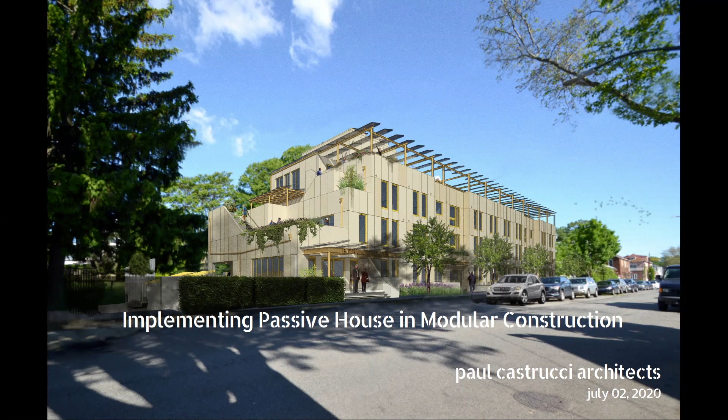Thank you, Andreas, and good afternoon, everyone. My name is Ashok, and I'm the sustainability lead for my firm. Grayson and I are really excited to present our firm's approach to designing low-carbon, healthy homes. We believe architecture should be equitable, sustainable, resilient, and foster community. We approach architecture holistically. We applied the Passive House methodology, and in today's presentation, we would like to discuss our approach to design by examining some of our key projects.

We will look at the challenges of building affordable housing, including drivers of costs in affordable housing, while aiming to hit the Passive House standard. Finally, we will present why we have chosen to go modular on some of our projects by examining two projects, Bethany Senior Terrace and Habitat Net Zero, to further explore topics in modular and passive house.

Our design aligns with UN climate goals. Some 40% of carbon emissions in the United States come from the building sector. New York City Local Law 97 emission caps are calculated directly from the UN climate goal, which recommends reducing carbon emissions by 80% by 2050. So how well does passive house stack up here? Well, it stacks up pretty well. We use data from the city's benchmarking report as well as in-house modeling on our existing projects.

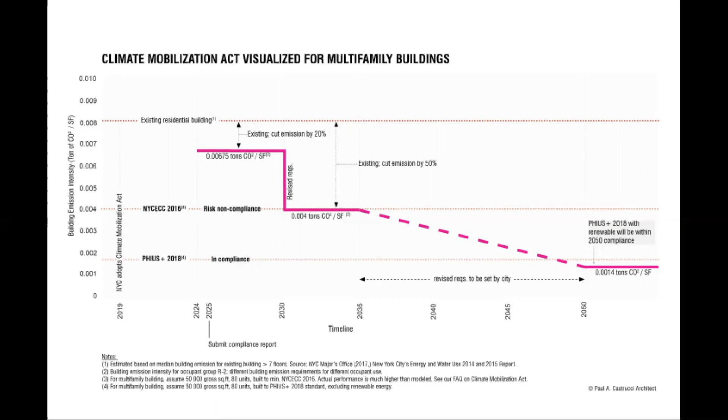What we find is that existing buildings on average don't meet Local Law 97 for 2024, and that when we build multifamily buildings to New York City Energy Conservation Code 2016, it's just at the target for 2030. So there is a risk of not meeting the 2030 emission caps. But when we look at projects being certified to the Passive House standard, we see that it comes very, very close to hitting the 2050 goals set by the city. Now, in our simulation, we didn't add renewables. So when we add the renewables, Passive House buildings would be within the 2050 standards. So now Grayson will talk a little bit more on our projects.

Yeah, thanks, Ashok. I'm Grayson Jordan. I'm one of two principals for Paul Castrucci Architect. Before we get into the modular case studies, I just want to give a little background on our firm and historically how we've come to implement passive house in our work, and specifically how we implement it in affordable housing and how that's leading us to these explorations of modular construction for affordable housing.

So the first project I'd like to look at is our first passive house project, designed in 2009. It's the ABC No Rio Community Center. It's a 10,000 square foot arts and activist community center located in the Lower East Side. Our firm is a Lower East Side firm. We've been working in this community for 3 decades. And a lot of our work historically has been with local artist groups and local low-income cooperatives.

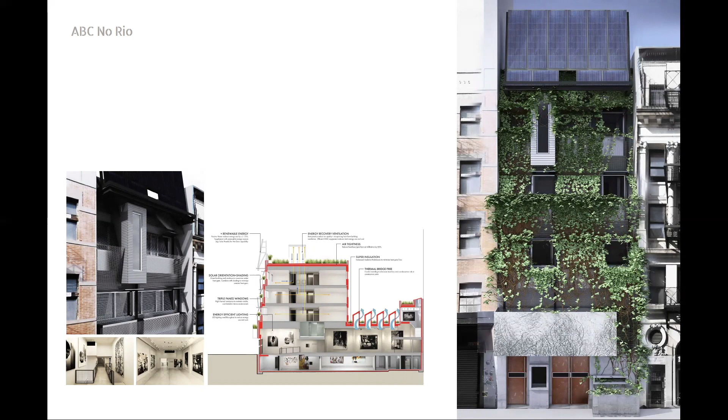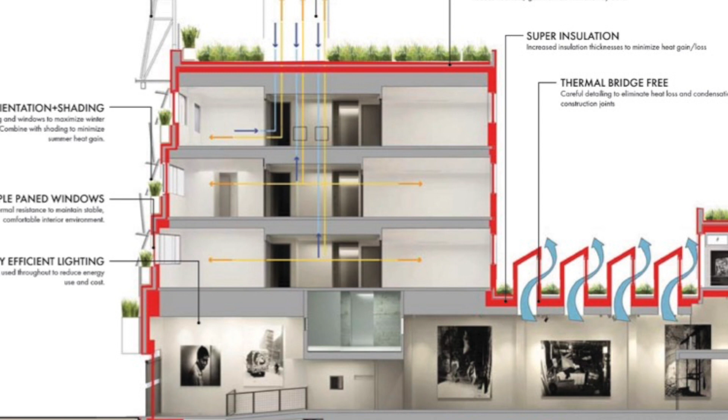Working with this group, ABC No Rio, they wanted the design to sort of visually signify their values. One of those is environmental justice. So in addition to the green wall at the front facade, implementing Passive House was very much aligned with their values. ABC No Rio is a grassroots organization, so they don't have the deepest pockets. And so from our very first Passive House project, our firm has been very interested in developing detailing and constructible standards that can get us to Passive House on a budget.

And so we're really looking to leverage existing construction materials and construction techniques that are well known by local tradespeople, and also clearly communicating to the contractors, especially during the bid phase and pre-construction phase, to make sure that we're doing the best we can to deliver these ambitious energy goals within our budget.

Fast forward to 2014, we've been doing Passive House for about 5 years at this point. We're finding that some of our clients are value aligned with us and are looking to push for sustainability, but not everybody is. And so we're looking to create a demonstration project that shows Passive House makes sense for all projects. And so as an office, we developed a small project in Brooklyn called R951. This is a 3-family, 5,500 square foot building in Brooklyn, certified to the Passive House standard, completed in 2015.

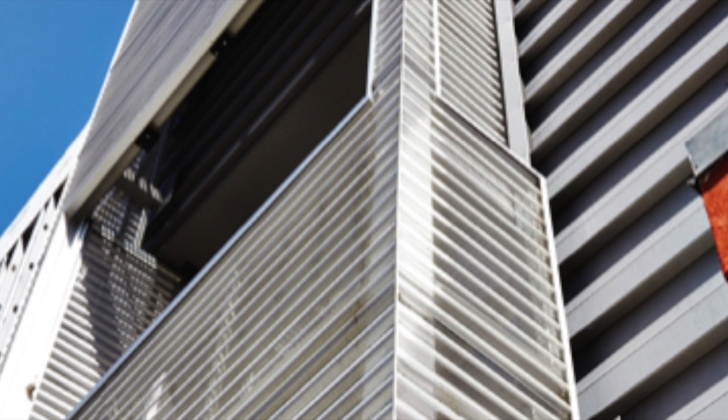It meets and exceeds Passive House standard, and then we have supplemented with rooftop solar PV to become, I think, the first building in New York City that's certified both Passive House and NYSERDA net zero capable. And so you'll see in some of our work, this is a big interest of ours, is using Passive House to push energy use way down, supplementing with solar to achieve net zero capable buildings. And I think, again, successfully showing that Passive House can be economically implemented and can perform well on the open market.

I'll turn it back to Ashok to talk a little bit about our deep energy retrofits for affordable housing. This slide, we're presenting our benchmarked energy data for completed retrofit buildings. In our office, we benchmark all of our projects. We do this for two main reasons. One, it allows us to compare the projected energy consumption with the actual performance. And two, it also allows us to tweak our in-house modeling results.

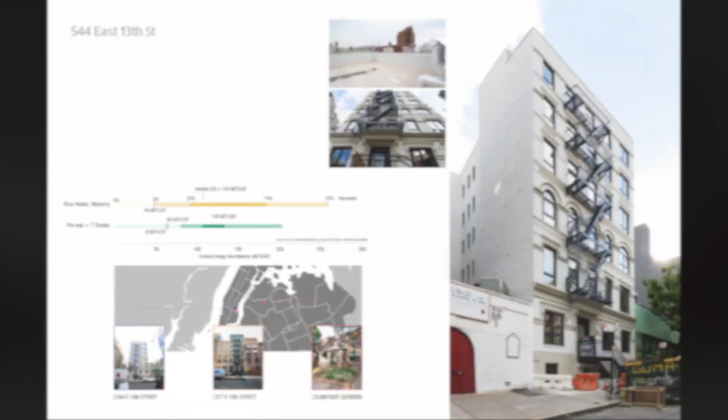What we're presenting here are two 6-story multifamily buildings in the Lower East Side and a historic row house in the Sunnyside Garden District. In the larger photo, that is 544 East 13th Street. This is a pre-war multifamily building retrofitted in 2018. It has 6 floors and a basement, and it's about 14,000 square feet. And this building is an affordable co-op. So when we were retrofitting the building, because it's an affordable co-op, we had a very limited budget, but we still were able to apply the Passive House methodology.

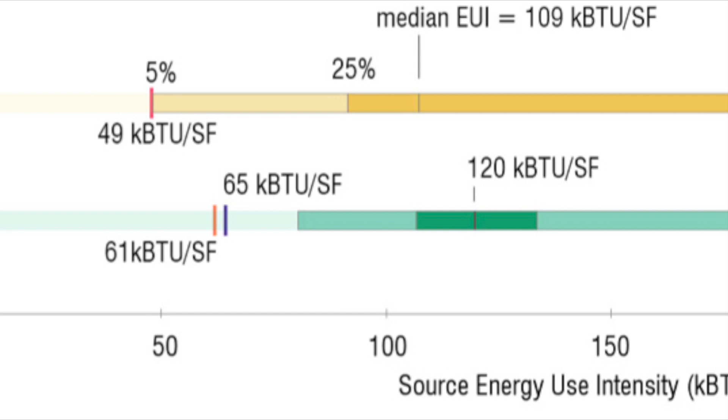And what we find is that even when projects are not certified to Passive House, the building tends to perform really well. The good news for us is that when we compare our benchmark energy data, which is shown in the graphic right above the map, to the city's report that's based on benchmark data submitted to the city, what we find is that the performance of all 3 retrofitted buildings are in the top 5% in terms of energy efficiency when comparing to existing buildings that are the same size and have the same occupancy.

So building on that work of smaller buildings and deep energy retrofits of existing affordable housing, our firm wanted to start to think about, as I think a lot of people are, addressing the larger affordable housing crisis. And we understand that this needs to be done on multiple fronts. So of course we want to continue with the deep energy retrofits. It's a really big piece of the puzzle, maybe the biggest piece. But we also want to contribute on the larger new construction affordable housing. And we also recognize that some of the leaders in implementing Passive House in the city have been our colleagues designing affordable housing. So we started to seek new construction affordable housing projects that are a bit larger in scale.

And so here you can see 4 larger buildings, 2 in Manhattan, 1 in the Bronx, 1 in Far Rockaway, Queens, that are beginning to get a little bigger but still implementing Passive House standards. So on the left, you'll see earlier design. Top is a schematic design project in Harlem, a design development stage project in Manhattan. On the right, we're a bit further along. Bottom right is an affordable housing project in Far Rockaway, Queens, which is in construction documents. And on top is an affordable senior housing building in the Bronx that is under construction now.

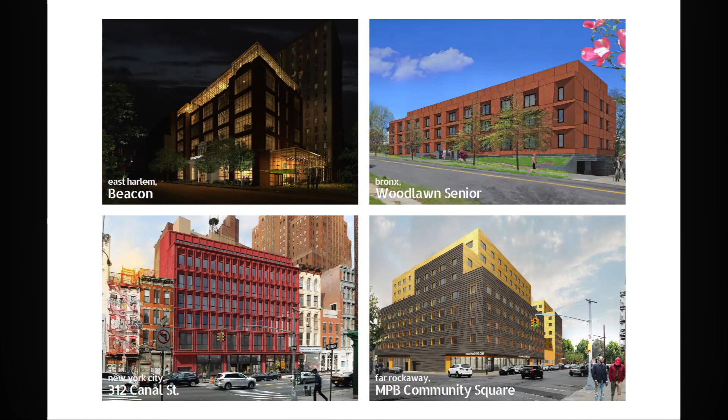So this slide sums up very well our holistic approach to buildings at our firm. We push for net zero energy by combining Passive House with renewables. We use energy modeling extensively in the early design phase. It enables us to make better decisions, and in most of our projects show an economic case for Passive House buildings. We also make a case to our clients to go full electrification. It helps reduce carbon emissions, is cheaper on our clients' utility bills, and healthier for our occupants.

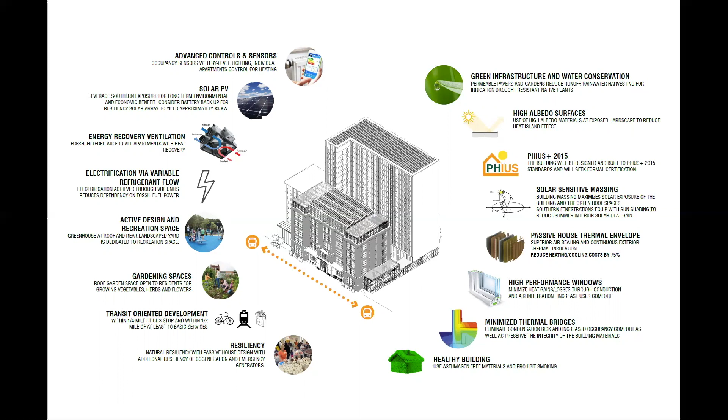And since we spend most of our time indoors, we take extreme care to use up-to-date standards to design for a healthier indoor environment by providing adequate ventilation, designing homes that will also cause fewer illnesses. We select materials carefully so they do not off-gas, and we also use THERM extensively to ensure minimal condensation risk.

Affordable housing construction in New York City is really a pretty well-defined process. It's typically going to be block and plank construction. And there are a lot of people doing really good work within this typology, especially implementing passive house in New York City. But there are limitations.

Specifically, there are budget limitations, primarily driven by labor cost, especially in senior housing, which, as many people may know, is driven by prevailing wage rates, which increases construction costs by up to 60 or 70%. You're also, for the most part, married to this construction typology. Most affordable housing is done this way.

And as we begin to contemplate how do we get to true carbon neutrality, we need to start thinking about whether buildings that are primarily made of CMU and concrete plank are really the best system to get there. As with any construction typology, there are also planning and layout rules of the road that will affect our layouts and our maximum height and what we can do with our setbacks. And finally, there's always an issue of quality control, which gets exacerbated the bigger you get.

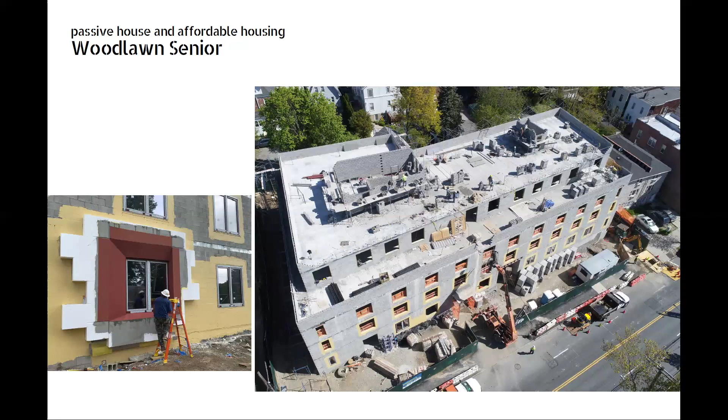So whereas the first mock-up might be excellently installed by the best crew, do the 50th through the 100th windows get installed by the same crew? Are they done on a cold, windy day so some corners are cut? And we're always looking for ways to make that process better, which brings us to modular construction. Before we get into our case studies, just a word on what we mean by modular.

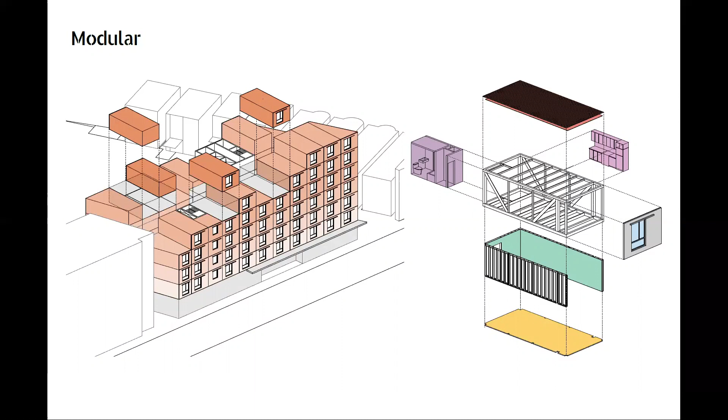Modular to us means it's a 3D object. We've got 4 walls, a floor, and a roof. Within that is completely finished space. So you'll have your kitchens and your bathrooms and all your finishes installed. Your windows will be installed. Depending on how you deliver the modular, perhaps the facade is installed or perhaps not. These mods, as we call them, these boxes, are built in the factory completely, shipped to the site, and stacked up to make the building.

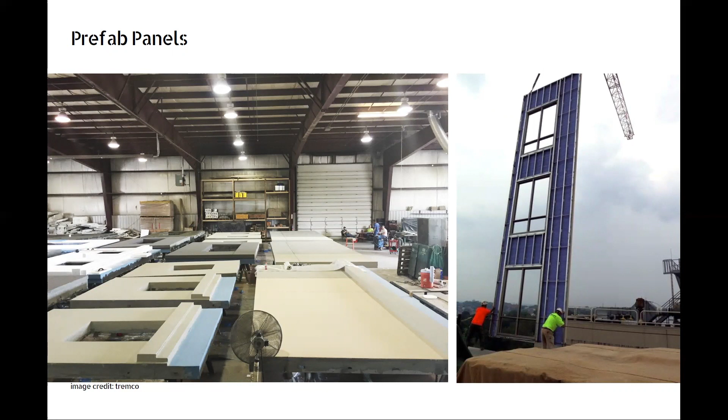This is a bit in contrast with prefab panels, also a factory produced product, but this is going to be more flat pack. So floors, roof, and most predominantly wall panels built in the factory and shipped to the site and tilted up. This is also a really great approach that we're looking at, especially for deep energy retrofits, the Energiesprong approach. And we're also actually looking at it in combination with modular. But for the purposes of today's discussion, we really are just talking about these 3-dimensional boxes or mods.

And what's pushing us here? 3 main reasons. We want to control cost, especially in senior housing. The ability to push labor offsite is beneficial. We want to reduce construction time. We're expecting these projects to be delivered on site in at least 25% less construction time, probably more. And we want to increase quality control.

With those benefits, there are design considerations that we have to manage. Those include the size of the mods and plans. You're going to be limited in your spans, usually much less than you would typically get, probably around 15 feet. The height of the mods, so that means both the total height that can be shipped, but also as you're stacking mods up, you have at each condition a thicker floor plate because you have a ceiling of the mod with the floor of the mod above it. You're getting increased floor plates, which can be tough to meet the zoning requirements depending on the zoning district.

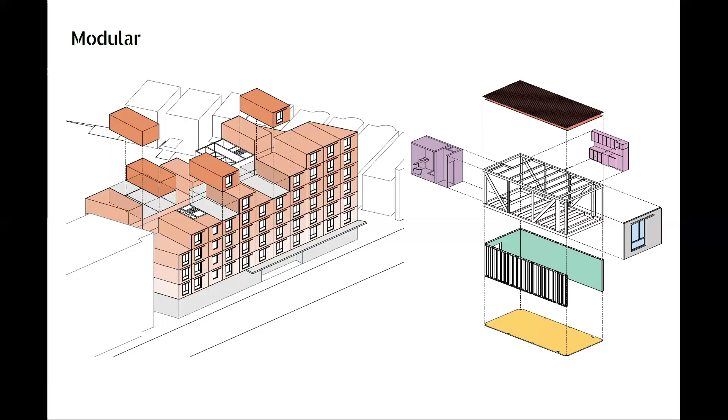We'll of course have to think about the transportation and stacking of the mods. The way that we implement MEP is going to be a bit different in modular construction, and with the more robust MEP approach of passive house, this takes another layer of consideration. And finally, we need to consider testing and inspections through a different lens for modular.

So our first case study is the Bethany Senior Terraces project. This is a 58-unit senior housing building located in Brooklyn, New York. We have just finished 100% construction documents for the project, so we're close to the point where we start construction. This is located in the East Flatbush neighborhood of Brooklyn. It's an R4 zoning lot, so it's not very dense for New York City. A lot of 1, 2, and 3 family buildings in the surrounding neighborhood.

The site itself formerly housed a 3.5-story institutional use. So the 3 to 4-story use we're putting back, senior housing, is actually quite closely matching it contextually. From a design perspective, we want to leverage the advantages of the site, so that lack of density and the ability to have bigger yards, and use that to help meet needs of the residents.

So with senior housing, we want to really encourage socialization in our common spaces and also encourage activity. And so that manifests itself in this project through this series of garden terraces on the south facade. Starting from the top floor where we have a community room, we're carving away that southern facade in a series of steps that sort of bring you from the top floor all the way down to the lobby.

And these are garden terraces, places for the residents to sit and socialize or garden, bring you through the common space of the lobby, and then back out at grade to this sort of generous southern garden to the south of the building, which is about 35 feet, and then terrace down to our cellar community space. And by pushing down these terraces, we create light and air into that cellar space and really create this sort of circuit of activity and socialization for the seniors.

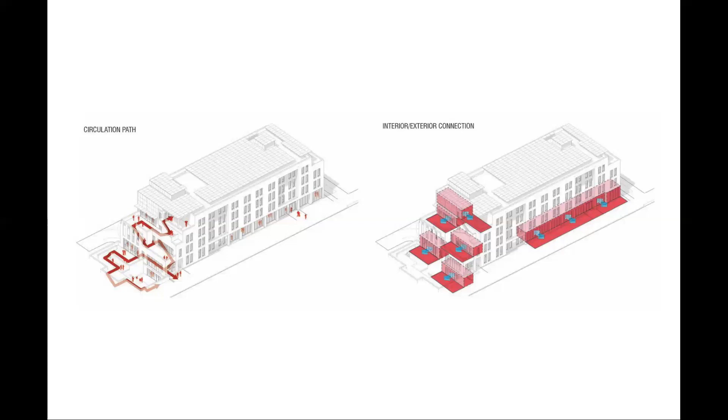This will be a Passive House certified building. We have a great client here who sort of demands that in the first instance, and we're building on that, pushing towards net zero by driving down the energy use with Passive House and then supplementing with a really robust solar PV array on the roof. We didn't quite hit the goal, but we got about 70% net zero capability here.

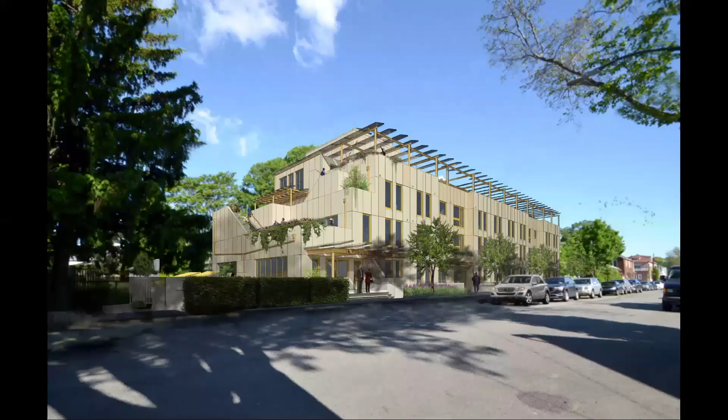Okay, so looking specifically at modular, as with any design problem, it's not linear. We're not trying to solve one problem at a time. We're trying to solve all the problems sort of holistically and together. But one of the first things we really need to look at in modular is transportation and staging.

So we need to understand the route that mods will take from the factory to the site, because there's going to be bridges and tunnels that will sort of dictate your pinch points and might change the size of your potential mods. And then at the site level, we need to look at where on the street can we stack the mods? How many mods can we stack for one day set? And where can we put things like the cranes? And this will dictate not only construction schedule and how many mods you can set a day, but again, may also dictate the overall size of the mod and influence the building planning.

So getting the ERVs into the apartments is beneficial for that. The other is there's actually some cost savings in this case, and this is something that makes senior housing particularly fruitful for modular. Some of you may know that senior housing in the city is prevailing wage labor, which drives up the cost, I would say about 60 to 70% over general affordable housing. And so moving some of that labor cost offsite is beneficial.

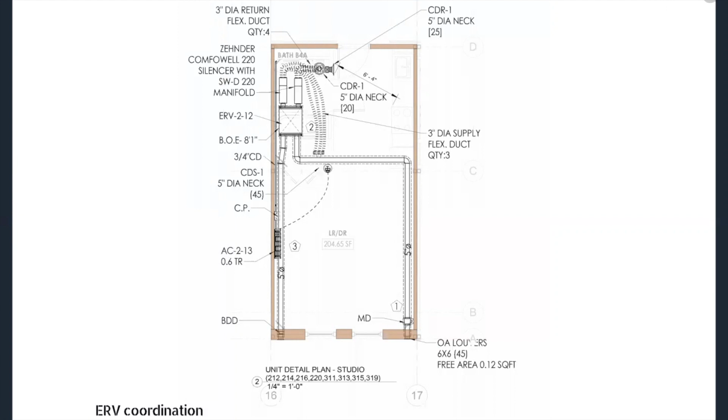This also affects how we're going to look at our bathrooms. So rather than back-to-back bathrooms, our bathrooms are going to sort of face the hallway. All of our stacks will be there. Looking specifically again at the ERV, you'll notice that this necessarily exhausts and intakes through the facade, which will have an aesthetic impact. You also need to carefully place your windows and your intakes and outtakes to make sure that you're keeping the clearances.

This isn't so much specific to modular, but it is specific to our goal pushing towards sort of a carbon neutral future. We want to electrify the buildings. And so we're not having gas hot water heating. We're going to use heat pump hot water heating.

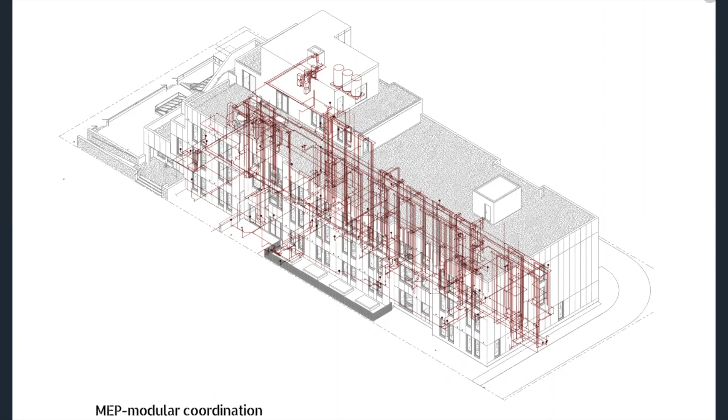And so the system will be comprised of 3 tanks, 1,200-gallon tanks in the thermal envelope connected to condensers on the roof. The condensers on the roof will heat up the water. Having that amount of storage helps us sort of move the load from peak to off-peak. And then we'll have a small amount of electric reheat if we need to get back up to the proper temperature. So just to wrap up this case study, looking at some of the wall sections and detailing issues for Passive House and modular.

Modular construction can come with the facade completely intact. In this case, we didn't go that way. Working with both the mod company and the GC, it made more sense here to build the mods to the sheathing, DensGlass sheathing, put on the air and water barrier, put in the windows, and then have the contractor come and scaffold the building and put an EIFS facade on.

The thinking there is, if you imagine stacking mods up on the site, no matter what, all 4 sides of that mod are going to have to be healed. So your air barrier, your insulation plane, your water barrier and your finish all need to be healed. And that's really important, obviously, in passive house. And so the contractor felt that by the time they put up all the scaffold and made all these small connections, it was actually more cost effective to just do the entire EIFS facade themselves.

2 other considerations at the wall detail level. First, if you look at the middle part of the section, you'll see a mod has a floor and a ceiling, and then the mod above it also has a floor. Block and plank is going to be an 8-inch block, 8-inch plank. That's your ceiling plane. This is going to be a foot for your floor plus 6 inches for the ceiling. So you're more than double what the floor plate is for a typical block and plank. And so that's a real consideration.

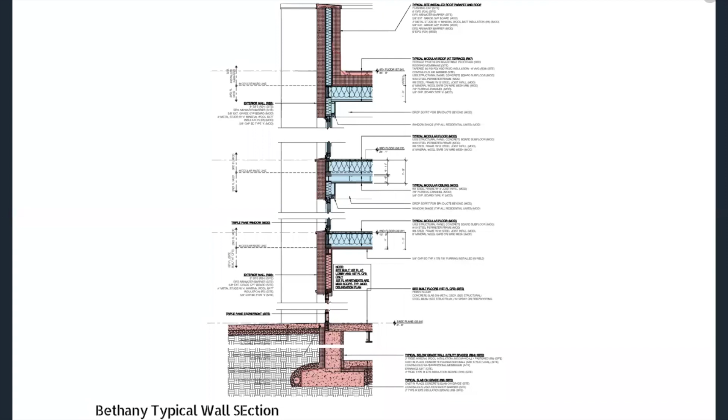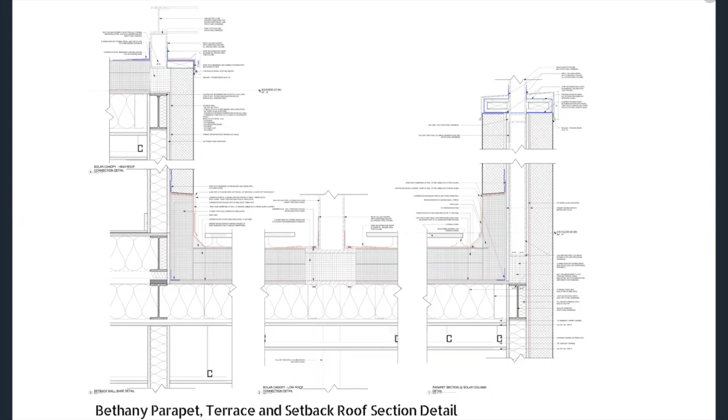This is a detail at our roof parapet and terrace setback. To note here, the parapets are built in the factory. They're like flat pack, structural steel or tubular steel rectangles infilled with metal studs and then bolted down to our mods. And that's a potentially very significant thermal bridge. So at that connection, there's an Armatherm thermal break. And we're using that same detail where we're connecting our solar trellis. We want to make sure that we're planning for all these connections and thermally breaking them. Next slide, please.

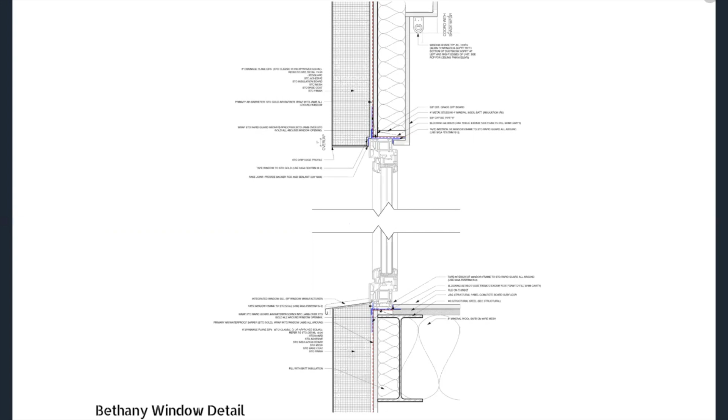They will wrap that into the jamb, install the window, air seal and water seal, tape the window all around, and then it'll be shipped. And the site contractor will seal all those mate line joints and install the facade. And that's it for this part of the presentation. I'll turn it back now to Ashok to look at Habitat Net Zero.

Thank you, Grayson. The next project we're going to talk about is the NYCHA Next Generation Initiative called Habitat Net Zero. This is a project with Habitat for Humanity, NYCHA, and HPD. We're really excited about this project. The aim of this project is to develop small vacant lots to help build single-family homes. To give some context, the city has acquired many foreclosed homes and lots, and the city has been looking to develop these lots to address the acute housing crisis. Habitat Net Zero will also provide a pathway to home ownership, which is critical to addressing the affordable housing crisis and will help blunt against gentrification.

The project is on 13 sites, which are spread across Queens, New York. A significant outcome of this project is to create a methodology to deliver beautiful homes that are healthy, energy efficient, and at a price point that is affordable. So the project scalability, especially on a citywide basis, is a critical success metric for us.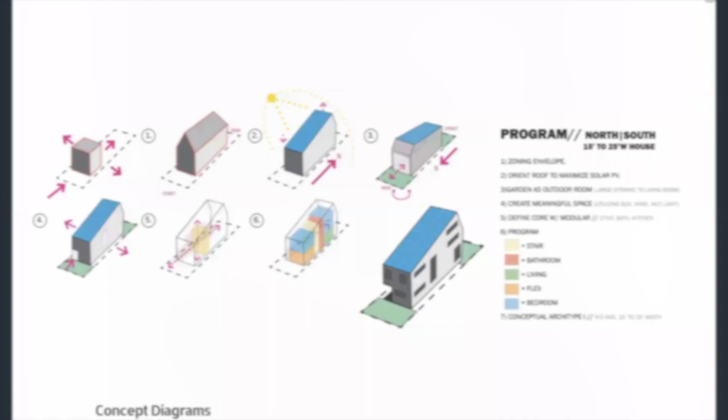We realize that each site has a unique topography, site orientation for solar gain, lot size and lot width, and very different zoning requirements. We also have existing homes in various conditions, some of which were more cost effective to rehab. So in the end, 10 of the 13 sites would be modular and 3 would be rehab projects. Based on the different conditions, we saw a prototype that will deliver the healthy, affordable house that will hit net zero energy while respecting the price range.

The budget also required us to absolutely go just to the essentials. So this project is nearly Passive House, but not Passive House certified. What we found was that when we go towards Passive House and add solar panels, it gives us a cost-effective net zero home.

We engaged very early with the GC for site build. We looked at panel manufacturers as well as talked to modular companies across the U.S. We generally found that the more the building is built in the factory, the lower the price per square foot. Another factor that impacts the cost is transportation of the module, especially because these are smaller projects.

In one instance, there was a large tree that made the transportation logistics a lot more complex, and it drove up the cost, and that helped choose that building to go for rehab. Our final hard cost is about $280 per square foot, and we are really happy with that.

So here we have prototype A. We eventually came up with 4 prototypes. This is based on site orientation, lot size, zoning regulation. Many of our prototypes from A, B, B2, and C have very similar concepts. So the 10 modular homes, it was treated as one single project for HPD. And so we were required to provide one UFAS unit. So this would be our accessible unit.

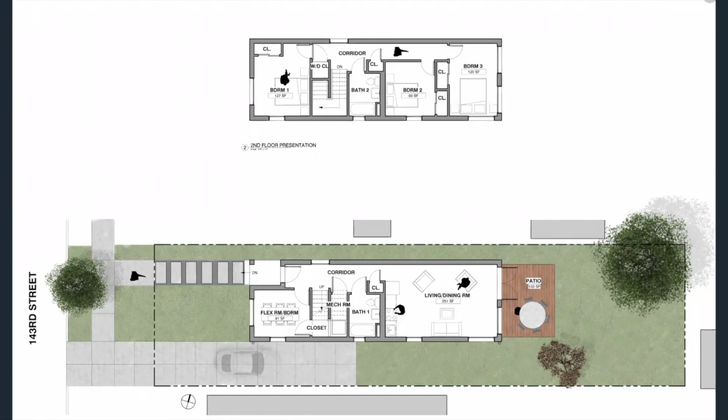Finally, we have a flex room that could be used for dining or den, but it also could be converted into a bedroom to allow for growing families and aging in place. And to help with the architectural design of the project, we added a solar parapet.

We also use energy modeling extensively early in the design phase to help us optimize for site orientation, window-wall ratio, and window selection. So this is like one of our studies where we were looking at the impact of where we're putting the windows, and that had a big impact on the final energy balance.

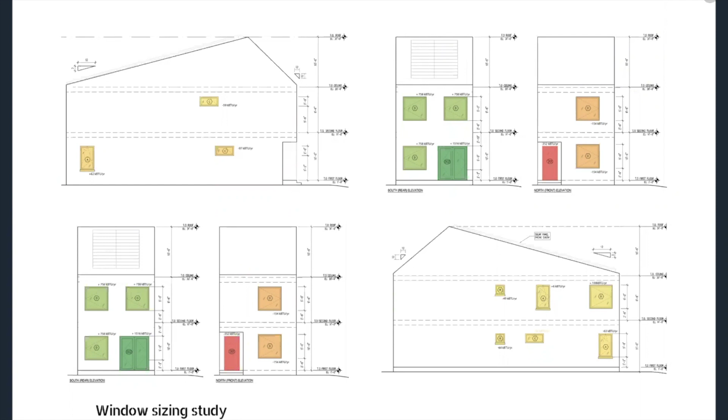Next slide, please. So here we demonstrate how the mods will come together on the site. So first, the GC scope would be the foundation. So the GC will build the foundation on site. Then the first mod will be craned in, and finally the second mod on top of that. The modular solar parapet and solar panels are then craned into place. Finally, there's the patio and the stairs, which also fall under the GC scope and are built on site.

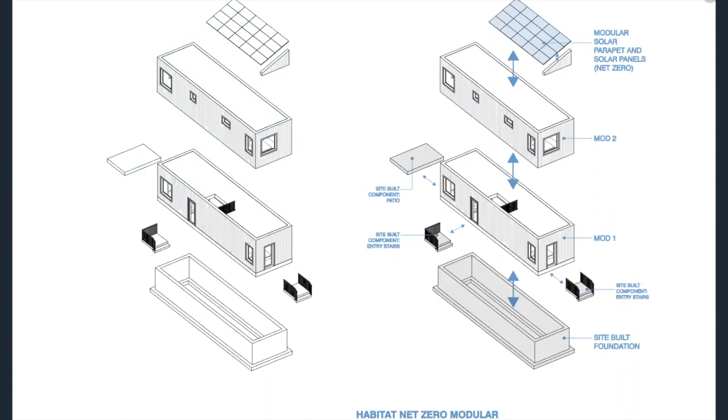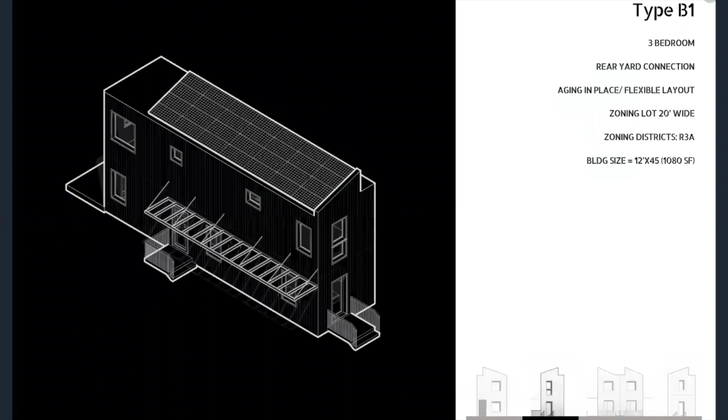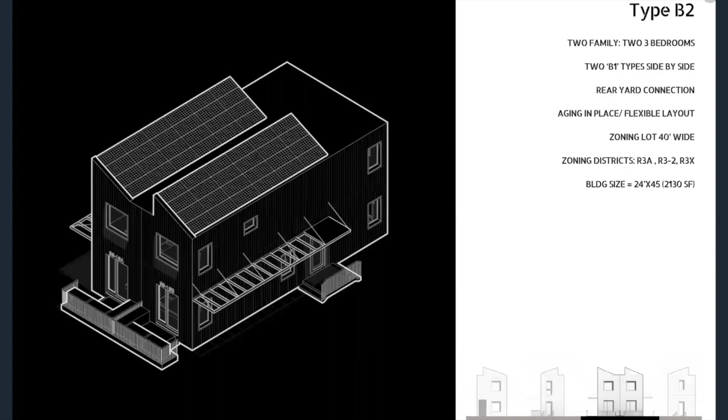This is type B2, and it's meant for larger lot sizes where it could accommodate 2-family homes, and where zoning allows for 2-family homes. And basically, it's 2 B units put together. Our smallest lot size home is the C. It has 2 bedrooms, and this is about 800.

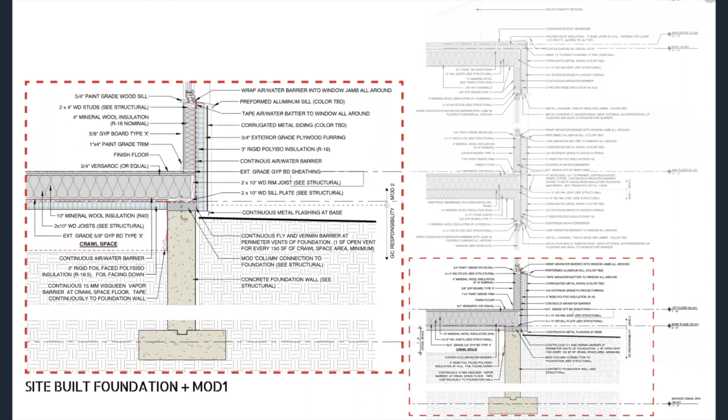So now I just want to go over some of the detailing for Habitat Net Zero. We went with a wood frame construction. The cladding and the exterior insulation here are factory installed. So if we look at the foundation, here's one of the points where we will get a thermal bridge. So how we address the thermal bridge between the foundation and the first mod is to use Armatherm all around as our thermal break. Next slide, please.

We use triple pane glazed windows. Again, this detail is important because this is where the first and the second floor come together, and we see the mate line detail. We also have a double floor plate here between the first and second floor. So basically, how do we get the air barrier and continuous insulation? So in the factory, about 1 foot around the mate line does not have insulation. So when the modules are on site and put together, the GC will then ensure the air barrier and the weather barrier are sealed and continuous, and then insert the insulation back.

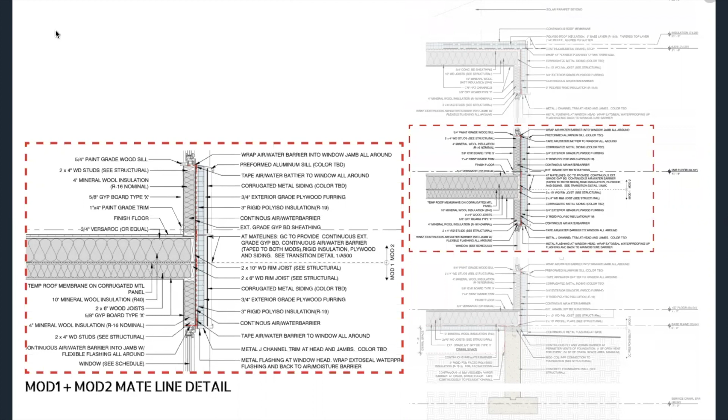So this is the roof detail. What we see, we have about 3 inches of polyiso all around the building, except the roof has a little bit more insulation to get a higher R value.

And the roof is a pretty simple construction. It was mainly driven by cost. It's a flat roof, and the insulation and air barrier is continuous and it's factory installed, so there's no problem there. There is a solar parapet that gives sort of our design feature.

So to summarize, here we have two connections. Basically, the first floor mod to the foundation, where we have the thermal break, and then first floor to the second floor, where we have the GC that could seal up the air barrier and weather barrier.

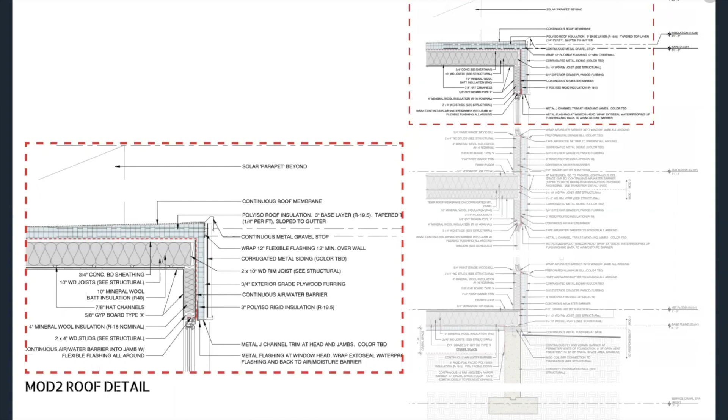Great. Thanks, Ashok. I saw in the chat somebody was asking about this. So modular is going to be a little different in the approval and inspection process. And these two case studies are good because they demonstrate the two possible paths for approvals. So looking at Habitat, which Ashok just went through, smaller one and two family buildings, you apply at DOB the way that you would apply for any job. They look at zoning, they look at fireproofing, but the mods themselves are considered a product.

So the modular manufacturer takes the drawings of the mods, takes them to New York State, has them certified as a product, which is delivered to the site like a very expensive window, for example, or just a big sort of complex product, let's say. So the inspection of that and the certification of that is all handled offsite.

For the larger projects, for most modular in New York City, again, you're applying at New York City, you're looking at zoning, you're looking at proximity to neighbors and fire protection and all those issues at the DOB level. But as you can imagine, a lot of the plumbing and sprinkler and fire protection is being built off-site. And so DOB is not sending inspectors out there to inspect that.

And so the way that works is a third-party inspector before approval takes responsibility for that. And these are inspectors certified by the city, by OTCR, and they will, during that process, inspect all the things that would normally be inspected on the site. So your sprinklers, your plumbing, etc.

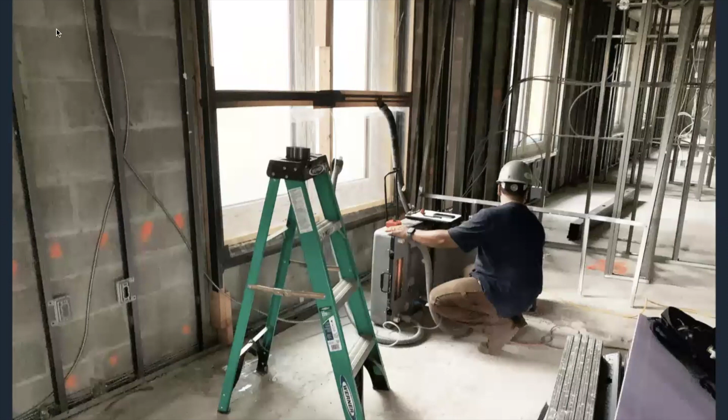But also when we're looking at Passive House, we have this other layer of quality control and verification. And again, that's being moved to the factory. And so the onus then is on the design team to set up the protocols of how those inspections go. And for both of these projects, which again are wrapping up construction documents, we have had the conversations of we really want to be doing all of our mock-ups in the earliest mods.

We want to be testing the earliest mods for airtightness and making sure that all the quality control checks are front-loaded. Just like with any building, you want to inspect the first window to make sure that they got it right. And if there's something wrong, you fix it, and that fix can permeate throughout the rest of the construction. A reflection we're having in our firm is reducing the life cycle carbon emission.

So what we find through research is that material selection and construction of the building accounts for about 20% of the building carbon emission. And when we calculate it for Passive House, this percentage can be as high as 40%. So while we see a lot of research tackling operational costs of the building, there's really little literature on carbon emission from the actual construction process. And this proportion of carbon emission during construction is significant and shouldn't be ignored.

So we don't know if modular construction will be effective at reducing life cycle carbon emission, but we wanted to still present what we thought about it. So carbon emission from the construction process can be measured based on the transportation of materials, on-site equipment use, and on-site electricity use. In theory, quicker construction time reduces on-site equipment use and on-site electricity use. And in construction in New York especially, we use significant energy to condition the site, especially in the winter.

Similarly, the transportation of material can be reduced by improved logistics of the manufacturer buying in bulk, and this will also help reduce material waste. As a firm, as we're becoming more interested in understanding carbon footprints of these buildings, our next steps for both of these projects is to model them in EC3 against a base case. So for Bethany, that would be a block and plank building. But also, even though it's not permitted now, we're going to look at it if it were framed primarily in wood.

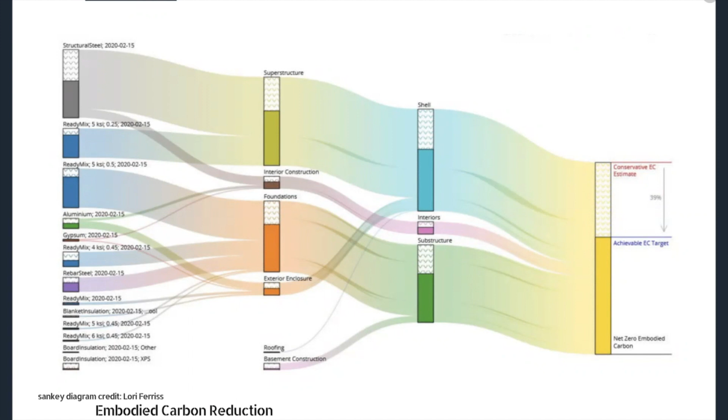Just to begin to have an understanding of what the ramifications of those design decisions are, and maybe move the conversation to a point where more of a wood frame building might have really positive carbon aspects, and just trying to figure out how do we make those buildings safely, but also deliver on a carbon neutral future. So we would like to end this discussion on a few words on COVID-19.

In the absence of the vaccine, the home becomes a very critical health infrastructure. And when the homes are not healthy, its inhabitants suffer. So as we move forward to a post-COVID-19 world, we need to address the structural causes of inequalities that have left millions of Americans out of the home. And the situation only grows more magnified in crowded conditions, especially in low-income multifamily buildings, where we saw higher rates

of exposure to COVID-19. What ASHRAE says is that improved ventilation through filtration or dilution of the air, and maintenance of water waste systems help mitigate spread of COVID-19. And we will probably see some code changes to make buildings more resilient to pandemic. Some of those possible changes would include adjusting occupancy limits of spaces, enhancing building HVAC operation, improved water quality management testing and practice, requiring touchless operators and control, additional signage, and additional entrances and exits to buildings.

You know, the Passive House community are trendsetters, so it's good for designers to be conscious of these ways to make buildings more resilient and incorporate them in our design before the code.

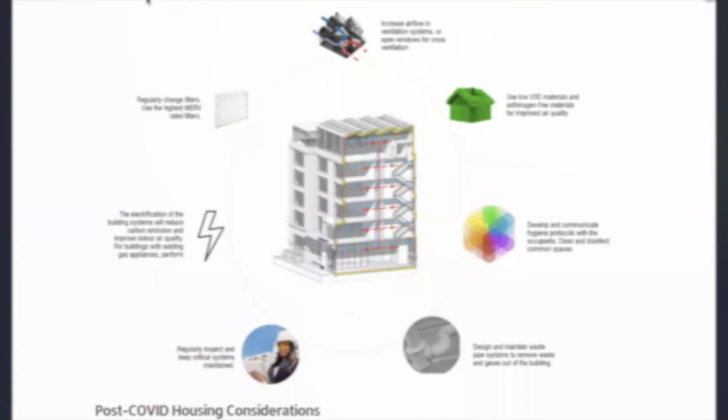There is a question regarding cost. You mentioned $280 per square foot cost. Is that hard cost, or is it hard cost and soft cost? That's hard cost. And then for the other building, Bethany is being negotiated. So I don't want to give the exact cost, but I'll just give the range. What we expect to see for senior housing in the city is $425 to $500.

It's in that range. And what's driving the difference between those costs is really the prevailing wage. If it were general affordable housing, we expect it to be in the $250 to $300 range. And the hard cost includes everything, kitchen and build out? Oh yes, the hard cost includes everything, all construction costs, and excludes obviously site acquisition and professional cost.

There's a question regarding which company you used to produce your pods. They were different on both sites. For Bethany, it's Whitley Manufacturing, which is a great company, and for Habitat, it's Modular Steel Systems. There's one question by Caleb. He asks, which domestic hot water system did you use? For Bethany, that was LG. We had looked at another one earlier in the process. LG was cheaper. I forget the name of the first one we looked at.

There are a couple of questions regarding what kind of cladding you would recommend. Bethany is EIFS, which is foam, and we are looking to get away from foam. There again, you're always balancing a lot of different competing requirements, and for that specific project, hitting the energy requirements at the cost points is what's driving that decision. And then for Habitat, it's a rainscreen with corrugated metal siding and again polyiso foam insulation.